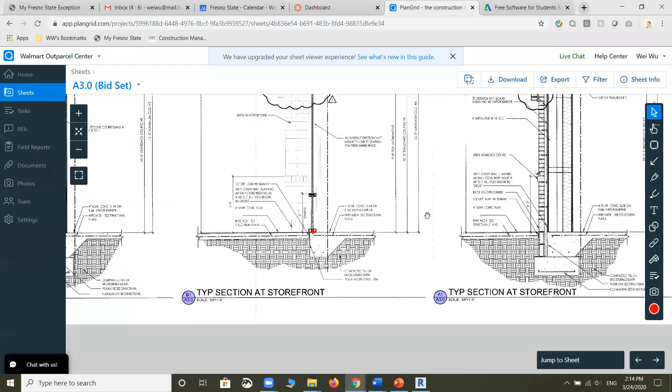So let's go to one of the section views. Section view sheets A3.0, particularly looking at B1. This is a section view for the front, the storefront. You will see the current one right there.

What we haven't actually done as part of the structural framing is one individual framing component we didn't get to last time, which is this hollow structural steel 6x6x5/16. This horizontal beam is actually a major structural component for the front facade of that storefront. So you have the curtain wall system, the storefront system at the bottom of the wall. At the top, above that curtain wall system, you have the regular EIFS system, which is a typical facade wall used in retail buildings.

Now, what we need to do is add that missing structural component to our original framing plan. The size of that steel component is HSS 6x6x5/16, which is easy, but there are more details in terms of where it's supposed to be. You're supposed to find that from the structural drawings. So we'll go to sheets S5.0.

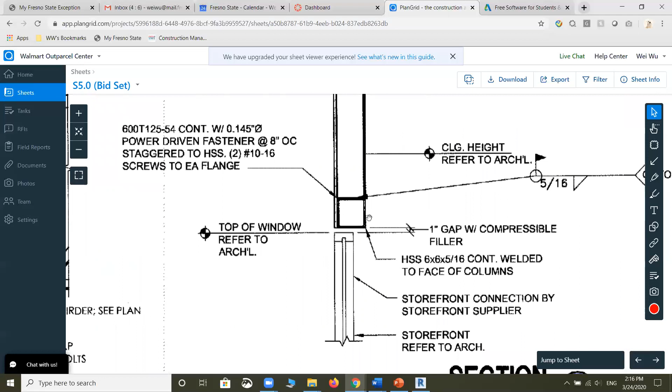Those details are for the structural framing, and you're looking at this particular detail here, right above the curtain wall system, and you see that particular hollow structural steel, which is here. In terms of its location, it's a 1 inch gap with a compressible filler right above the curtain wall itself. It's a 1 inch gap there, okay?

So you know its location, you know its size, and here is a note you need to pay attention to in terms of its horizontal location. It says here, continuously welded to face of column. So you will need to weld this hollow structural steel to the face of the columns at the front, on grid line 8. That's the location of that structural beam right there.

Now, its height, because this is 1 inch above the curtain wall system, it will be useful for us to actually find out the height of the curtain wall. Then we can calculate at what elevation exactly this HSS structure is located. So we'll go back to A3.0 and look at this particular detail here in the middle, B1 detail.

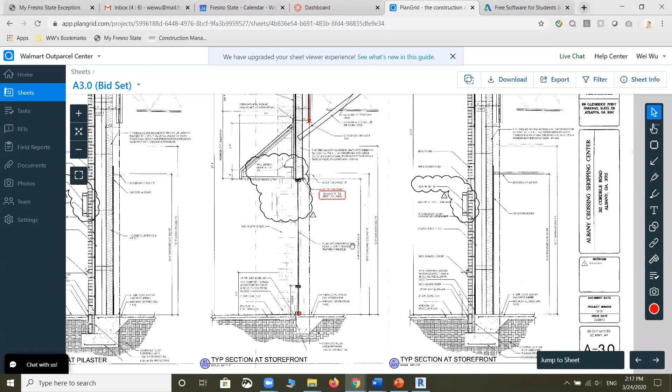All of you try to tell me, what is the height of that curtain wall system? I'm looking at this particular part here. So what is the height of the curtain wall system? If you could type your answer in the chat box, that'd be great. Let's see what the height is. Can you find it out?

Okay, well, we got the right answer already. Jerry answered 9 foot 8 inches. That's exactly right. See that? 9 feet 8 inches, top of storefront.

Okay, so let's do the math here. 9 feet 8 inches is the top of the curtain wall. Then you have a 1 inch gap there, so that's 9 foot 9 inches. Then remember that when we try to place a structural component, it's always starting at its top level. So in this case, the HSS structural beam we're going to place is actually 6 inches tall, thickness wise. So add 6 inches plus 1 inch to 9 foot 8 inches. You get that the top of the structural steel here is supposed to be 10 feet 3 inches: 9 feet 8 inches plus 1 inch gap plus 6 inches of its own depth gives you 10 feet 3 inches.

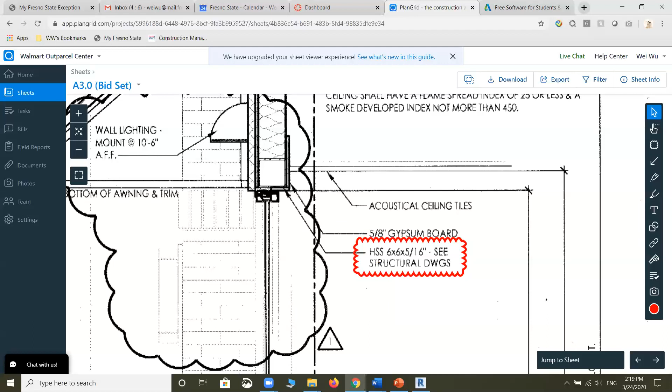So that's the height you need to place it at. However, our model does not have a 10 feet 3 inches level, obviously. So what we need to do is choose a level to place it, and we oftentimes choose the top level, a high level, when we're trying to place structural components. So what we need to do is place that at the 14 feet 8-inch joist bearing level.

Okay, open your Revit model, and let's go to our floor plan. Let's go to joist bearing, 14 feet 8 inches. Now, where is this structural steel supposed to be?

It was supposed to be by the face of the column. One thing I'd recommend in this case, we're trying to place this structural beam and we have this roof in place.

We can hide this roof so we can actually see the column location and be able to weld the structural steel to the column. So here we can hide the roof. Does anyone remember the shortcut key we use to hide something? Does anyone still remember? We showed that in class last time.

It's something called hide element, right? You can right click and say hide in view, hide element. Or there's a shortcut key combination: E stands for element and H stands for hide. So you click on that and type EH, and EH is going to hide that component.

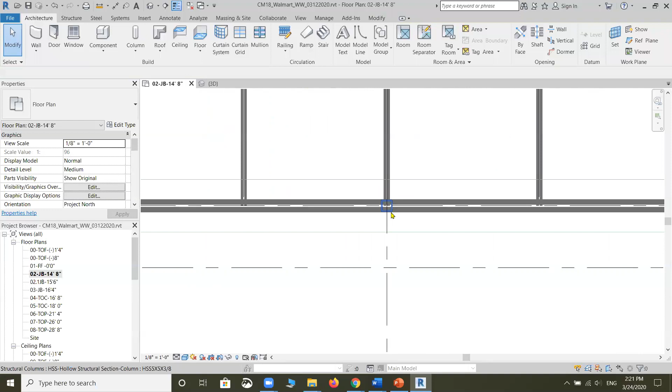Now if we go down here, what we're trying to look for is the columns. The column is actually right here, do you see it? Sometimes the color is actually distracting. I find the colors of the texture really distracting.

In that case, what I'm trying to do is hide the color. So I'll change my visual style at the bottom of the screen to hidden line. The hidden line is going to cancel the color of that component.

Now the horizontal structural steel that we are currently missing is going to go everywhere that gutter goes. So we're going to start right against that wall here, all the way across the whole building, and weld to the face of the columns all the way to the other side.

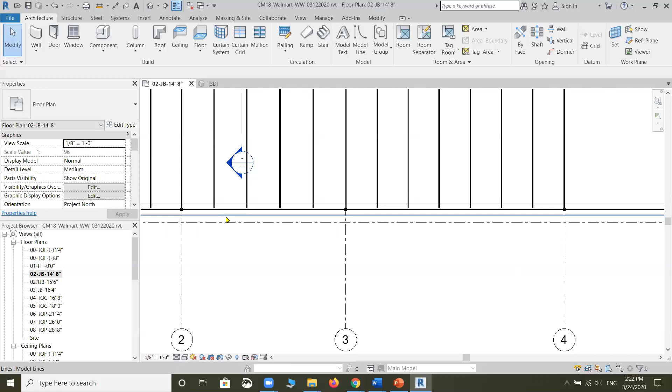Well, obviously, in reality nobody's going to manufacture such a long hollow structural steel. You will actually produce standardized sizes, such as maybe 20 feet or 40 feet, and then splice them at the spot of installation. But for the sake of saving our time, we're going to just draw this thing at one time.

So what we're going to do is make sure that you are on Level 2 Joist Bearing 14.8. Then we're going to go to our structural component and try to place a beam, so it's going to be a structural beam. Now at this moment, we don't really have that structural beam loaded.

We need a hollow structural steel. You probably remember we had columns that is HSS, but the column is a vertical structural component and the beam is a horizontal structural component, so they're quite different. So what we need to do is load that component.

So if we go to load family, because when we look up we don't find that HSS 6x6x5/16 structural steel we need, we need to go to load family. When you go to load a family, you'll see something like US Imperial, that's the library folder. We need to go into structural framing, and it's a steel structural framing component. You'll see HSS, hollow structural section steel, right? We choose that one, and then you'll see the whole list of different sizes that manufacturers provide.

So the one we need is actually HSS 6x6x5/16. You're going to scroll down and find that right there, okay? HSS 6x6x5/16. Choose that, and now you will have the hollow structural steel.

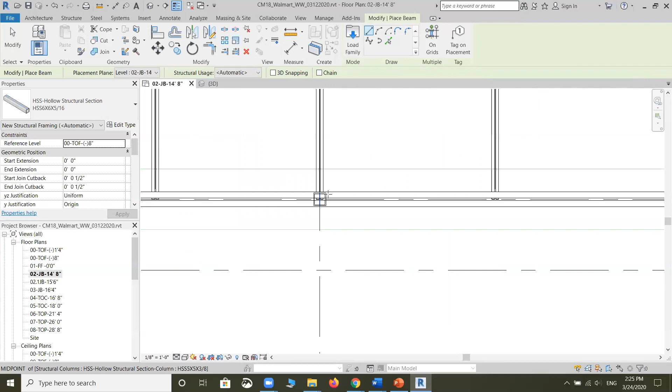We need to move that structural steel next to the column because they are welded to the column. So you'd say, why don't you start from this point here? Yes, we can, but it would not be able to snap to things, so we'd like to use the column as a reference first. We just snap to the face of the column anyway.

One thing you'll notice later is that the actual justification, which means when we're trying to place this structural steel, will follow the center line of the structural steel, which is not exactly what we want, but that's okay, we can move that a little more.

So at this point we just click on the first column, the exterior face of the column, and go all the way across the building right here, until you see the other wall. So you will stop there, at the wall.

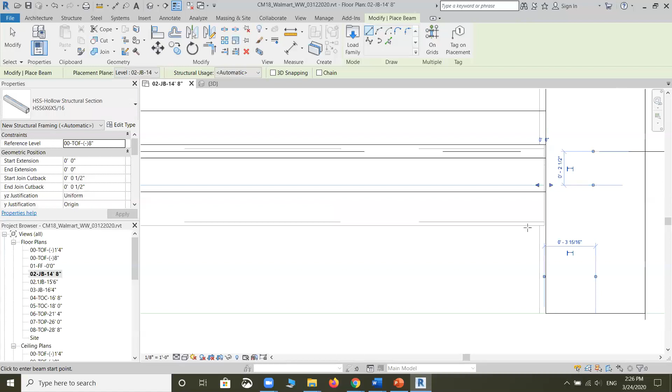After you do that, you'll see the structural steel. Make sure those arrows go to the face of that wall. So on the other side, you will extend this part.

I have a question, I can't seem to find the columns. It's not appearing on my screen. I'm on the right floor plan.

Do you see a pop-up message saying anything placed cannot be visible? No. Okay, did you place it though? The columns? Yes. No, the columns. Oh, the columns. You can't see the columns? Yeah, I can't see the columns.

Do you have your roof height hidden? Did you hide your roof? Yes. So look at grid line A2, can you see that column there? Yeah. Okay, so that's the column you're looking for.

I don't have that, I don't know why. You don't have the A2 column? No, the column doesn't even show.

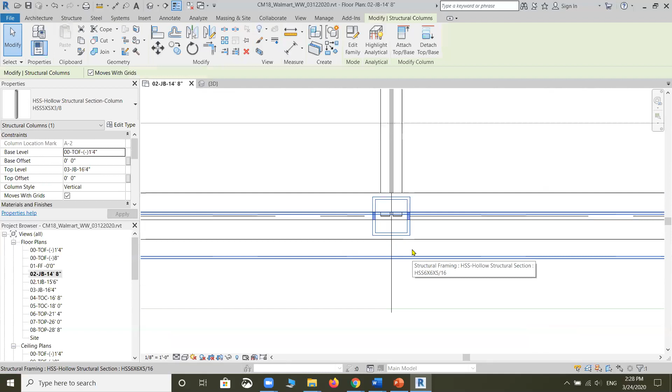In your 3D view, do you see the column there though? Let me check right now. Yeah, it's placed there, it's there, right? Yeah, and the elevation is 16.4, the topmost point.

You can use the spot elevation to check it. 64? Yeah, is it? Yeah. Okay, so let's try one more thing.

Come here, okay. What you need to do is actually check your view range. Wait, the floor plan? Yeah, go back to your floor plan. Okay, you're saying you can't see this column, right? Yeah, I can't see that.

Okay, and your roof is already hidden. Yes. Okay, so what do you see at this spot? It just shows like, I think it shows the wall, the brick. The wall? You don't have a wall here. Oh no, well it looks like there's concrete.

Right, that's the slab underneath it. Yeah, so it just shows that, but I can't see the column itself. Well, you can't see this column.

How about other columns? Let me check. No, none of the other columns are showing either.

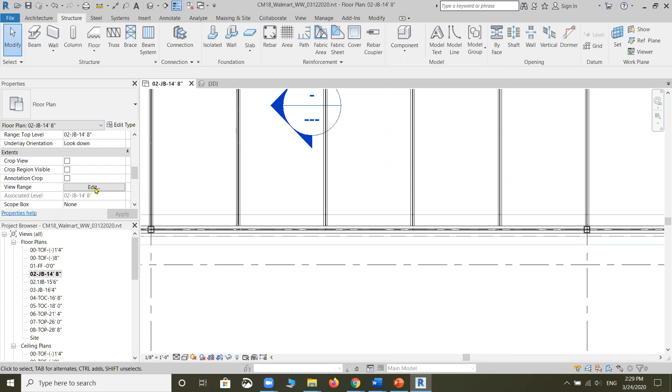Okay, do this. Don't select anything, look at your view range. Go to your project browser, rearrange, follow the palette, view range. Check, let's choose, make the bottom to be level below. Click on apply.

Does it actually help? I'm trying to find where it says view range. Right here, look at my screen first, where it says extents. Yes, click on edit. Fix your bottom view range to be the level below, and also the view depth to be level below. And click on OK.

You see that? Yeah, oh well, it's not working now. I'm not sure what's going on.

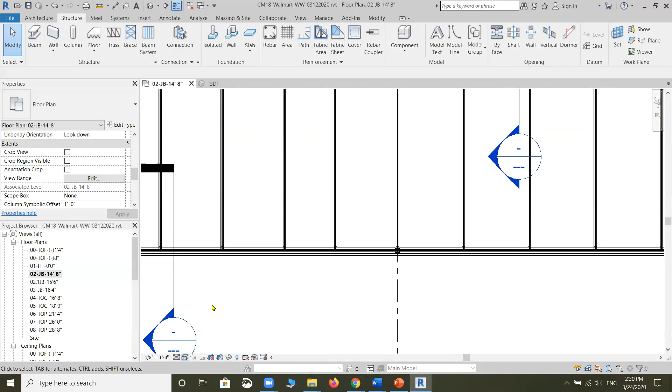Okay, how about we do this, try one more thing. Change your visual style, look at my screen. Change your visual style to wireframe. Okay, does it help? Oh, all my beams pop up.

You still don't see the column? I can see the beams now, but the columns still don't show up. Okay, one more thing - are you on the floor plan or the ceiling plan? I'm on the floor plans. You're on the floor plan. Yeah, and did you double check your spot elevation is 16.4?

Hold on, 3D - yeah, hide your roof. Check your spot elevation for me. Go to annotate, spot elevation. Okay, what's the reading? It says 16.4. Okay, and you have those gutters next to it.

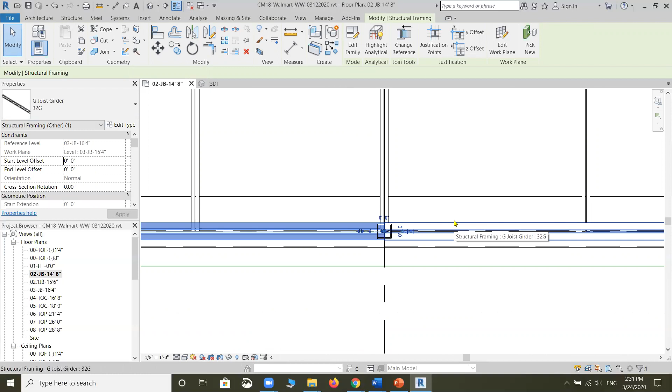Yes. So go back to your JB 14'8". Hide the gutters, choose the gutter. Do you see the gutters now? Oh, the gutter, okay, wait. The gutter - hide the two gutters.

Now can you see it? No, I don't know, I can't see it. You cannot see the column? Nope. And are you sure you're on the floor plan? Yes, I'm sure, it says floor plans and then there's ceiling plan.

Okay, let's do this - I'm gonna stop sharing my screen. You share your screen. Oh, I'm on. Okay, you share your screen with me. Hold on, let me turn on - not a video, your screen. No, at the bottom of your screen there's a 'share your screen with me', do you see that?

I'm not on my laptop. What are you on? My iPad. You're on Zoom on your iPad? Yeah, for Zoom. But I'm on my computer here. Okay. Can you see it? Well, I can barely see it, but okay, go.

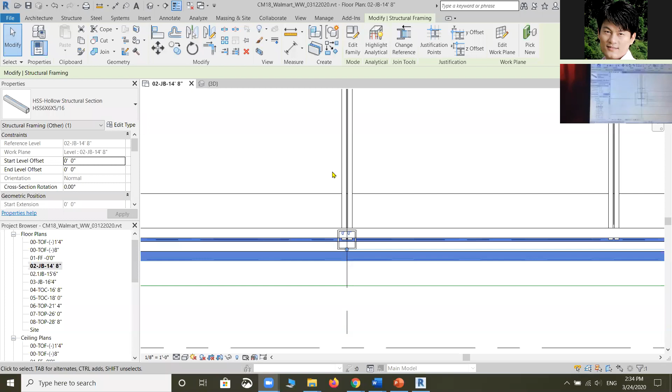All right, okay, so look at my screen now. Okay, I'm seeing what exactly you are seeing. That's the column. What I did is actually I drew the structural steel here. Okay, now let me share my screen a little quick again. The screen you're looking at - I'm looking at the column. That's the column I'm talking about. Okay, I see, I see now.

Okay, that's the column, you're looking at the wrong place. You're looking at this, not there. Yeah, you don't have a column there, you're looking at a different column. Remember that at the front we only have column A2 through A11. Yeah, okay, I remember now.

All right, so did you place this horizontal structural steel? Yeah, it's there. Okay, all you have to do now is make sure that you extend this thing towards both ends of the wall. This end is supposed to be against this wall, and the other end is supposed to be against the other side of the wall. Okay, now what do we need to do?

Go to your 3D view a little quick at this point. All right, once you see that 3D view, obviously there's a couple problems as a matter of fact. First problem: the column gets inside of the structural steel, which is not supposed to be the case, because we want to weld the structural steel - the horizontal structural steel - to the face of the column. So we need to move that forward a little bit.

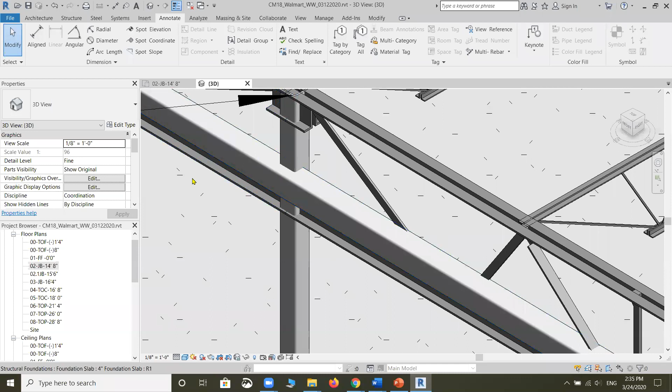Second, this is not at the right elevation, because currently that structural steel's elevation is 14/8, right? So we need to fix those two problems. So let's go back to our JB 14/8. The first thing I want you to do is this, right?

So choose one of the columns you can see here, okay? So grab that structural steel you just placed, which is the HSS 6x6x5/16, okay? Grab that. Then go to your modify structural framing tab there, and you see the modify - I want you to choose this component, this command, which is called move. Okay, see move right there? All right, click on move.

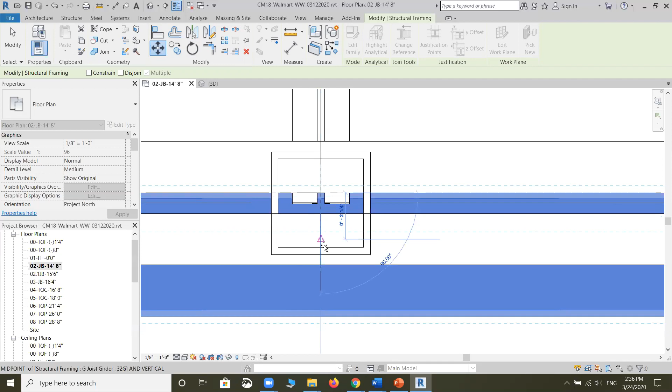Then once you click on move, first thing you're gonna select is actually the outer face, which is the exterior, the upper boundary of your structural steel. Click on that, okay, click on that. Then move it to the face of that column, okay, and just say unjoin component. That'd be fine. If that actually makes that extension fail, then you just move that, extend that again. Okay.

That's way too much. All right, let's actually drag that and extend it all the way to the wall.

Okay, that's what you need to get to. Right there. Then once we get that fixed, you can go back to your 3D view.

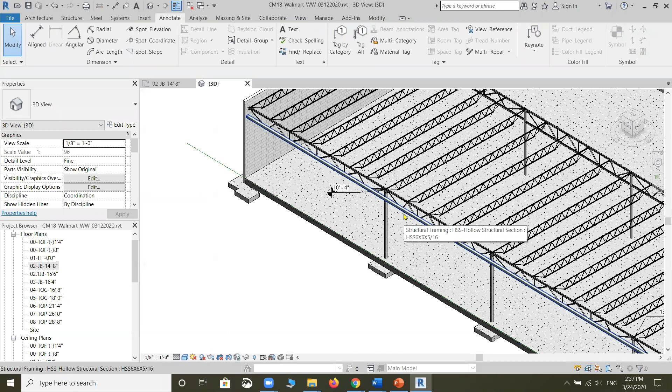You can see now it's actually on the face of the column. Now the height of this structural steel is not correct yet, so we need to go back as well.

So now, how do we actually change the elevation of a structural steel, like a structural beam in this case? Well, obviously you cannot drag that in 3D view because it's not going to be accurate, right?

So remember that what we had tried before is take advantage of these start and end level offsets, okay?

Crashed. Okay, all right, let's do that again. So what happened previously, right?

Okay, the HSS structural steel is here. It's in the center. You see the column interface actually kind of cuts through that horizontal structural steel. So what we need is to move the structural steel out a little bit to the face of the column.

So you select that structural steel first. You click on the move command, which is under Modify, Move command. Then you grab that interior side of that structural steel, and move that to the face.

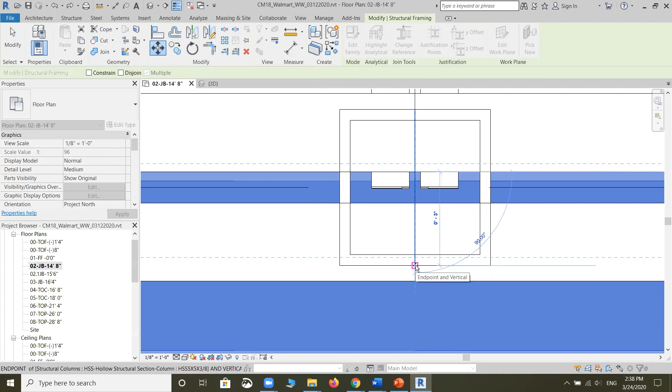Okay, do you see that face of the column? And you probably get a message saying it cannot keep elements joined. That's fine. All you have to do is just extend that thing. Okay, that's what we have done.

Move that to the face and say unjoin elements. So this is going to be short again. All you have to do now is just extend it. Again, after you move it to its right location, you extend that again.

Until you hit that edge of that wall, that'd be good enough. So you see now the structural steel is actually on the face of it.

If your beam is locked and won't allow you to move it, I'm not sure if I understand that correctly. So your beam is locked, is actually physically locked, it has a lock sign on it, or you just see that if you move that, it's going to be unjoined.

If it says unjoined, then that's fine, Patrick. So you just unjoin it, just like I did. Try that.

Did that work? Patrick, did that work?

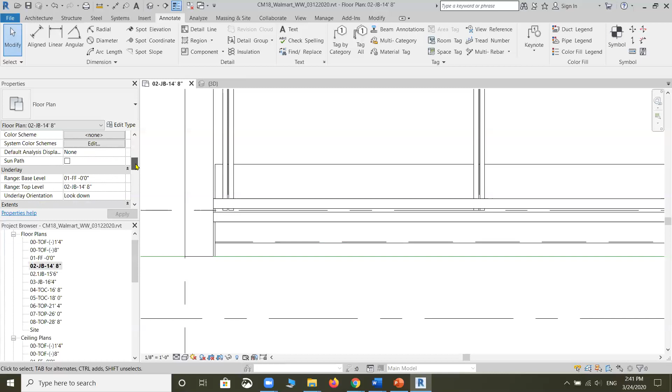Change your view range. You first scroll down, change your view range. Do you have a view range like what I set up here? Do you have a level below at finished floor 0, 0? Let's see.

No, I don't. Okay, so change that to level below, and also the view depth to be level below. Then click on OK. Okay, there it is. Now try that again.

Can you select that now? Yeah. Okay, so but you know how to move it this time, right? Yeah. Okay, so once we get that, now the next question becomes, well, even though this thing now is actually in the right place, it's not at the right height.

Our current height is at 14 feet 8 inches. We want this thing to be at 10 feet 3 inches, right? Remember that it's 1 inch above 9 feet 8 inches, which gives you 9 feet 9 inches.

But you have to take into account its own thickness, which is 6 inches. So you're adding 6 inches on top of 9 feet 9 inches. That's actually 9 feet 15 inches, which is 10 feet 3 inches. So your current height elevation is 14.8.

You want to move that down to 10 feet 3 inches. The difference is 4 feet 5 inches. So what you need to do at this point is actually use that calculation. So it's minus, okay, minus 4 feet 5 inches. That will give you 10 feet 3 inches, okay?

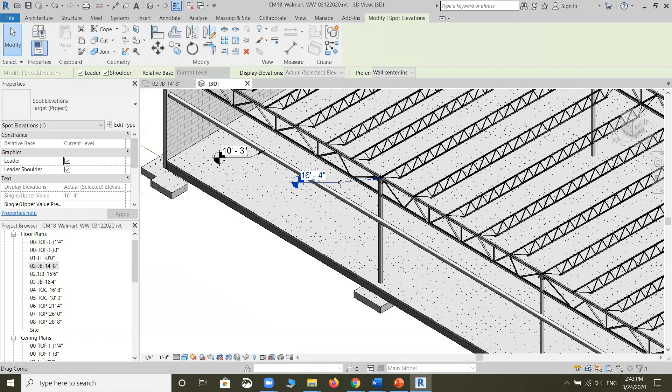Any question on moving this structural steel to 10 feet 3 inches? If not, we're going to move on.

Samuel, you have your hand up. Do you have a question or did you already get your question answered? Oh, I already have my question answered. I meant to lower my hand. Okay, that's fine.

So in that case, we are done with the structural steel, which was missing from our previous model. Now we truthfully have a complete structural framing, okay? Now let's move on to our curtain wall systems, okay?

So the curtain wall system isn't really that big a deal, but it does get some tricky parts when we're trying to model the actual curtain wall itself, okay? A couple questions there. First thing we already know is the height of the curtain wall is actually 9 feet 8 inches, right? That's the height.

Now, in terms of its location, the curtain wall system sits right by the edge of the slab, right? Right by the edge of slab. So when you look at your model, what you have is basically the slab edge, which is this green line there. Remember that? The green line is where the slab edge is. So that's where the slab edge is. Now, the slab edge is here, okay?

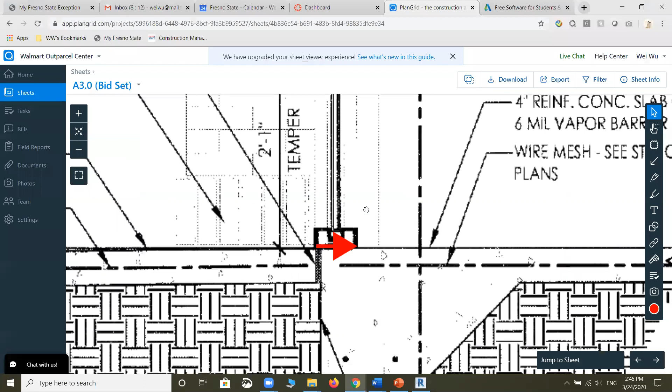And the curtain wall sits right by the slab edge, which is perfect because we already have a model line as a reference line in place. However, one thing I want to remind you is when we place a curtain wall system in Revit, it really only places the piece of glass first. Then you're supposed to place the rest of those mullions. I call it mullions because that's the name of the component.

But if you want to look at what I mean by that, you can search for, say, curtain wall storefront, and look at that image there. You see those aluminum pieces there, for instance, okay? Those aluminum pieces there at the bottom. So those are the mullions. The mullions have a thickness.

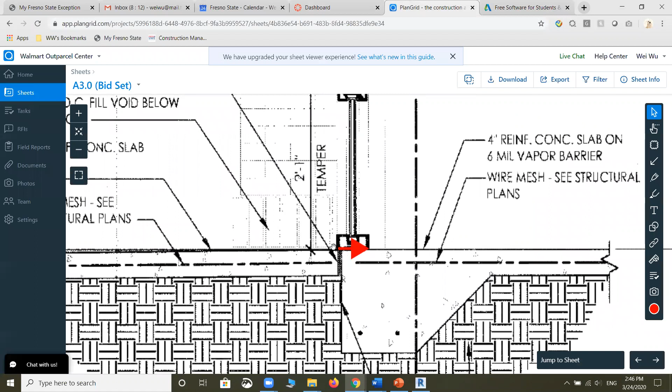The thickness of the mullions typically is 5 inches, which means if you look at your Revit joints here, this width is 5 inches. So the curtain wall glass is sitting in the middle. That glass is actually 2.5 inches away from the edge, because this is 5 inches total, and this one sits in the middle. So that's 2.5 inches away from the edge of the slab.

So that's the location we are going to place our curtain wall. Okay, so that's just one thing. Another thing is, in terms of the actual pieces of curtain wall system we have in the project, we need to come to your page or sheet A2.0. We'll look at the front elevation view. As you see here, okay, all those areas where you see those pieces of glass, all those are our storefront curtain wall systems. Together you have section 1, 2, 3, 4, 5, 6 different sections, right?

And unfortunately, because of the columns here that actually separate those sections of curtain wall, you cannot draw the curtain wall system continuously from this end all the way to this end. You have to draw those pieces individually, one piece at a time, right?

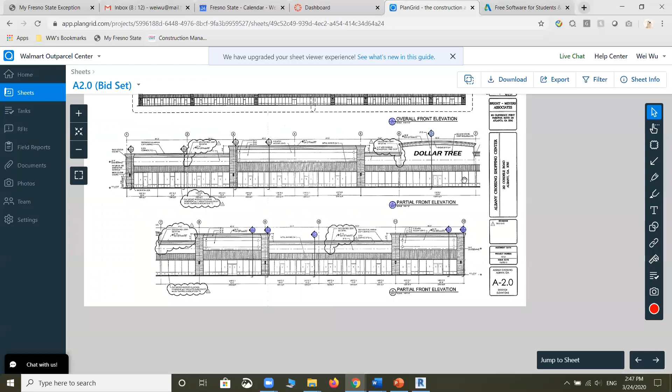So now the next question becomes, how do I determine where this section of curtain wall starts and where it ends, right? You have seen some dimensions here, but it will be easier for you to see the dimension at a different view, which is our floor plan, etc.

So this is your first section of curtain wall. Then it stops right here because you have a column. Then you move to the next one from 3 to 5, another curtain wall. Then from 5 to 8, another curtain wall system. From 8 to 9, another one. Then 9 to 11, another one. The last one is 11 to 12. So you have a total of 6 different curtain wall systems.

Now what we need to determine is, for this first curtain wall system, where does it start and where does it end? You approximately know this curtain wall system is between grid line 1 and 3. However, you need to know precisely how far away from grid line 1 and how far away before grid line 3. That's what we need to find out.

So if I show you this, you see that's the starting point, which literally is this side of the reference line for this dimension, starting right there. That's the intersection of the green line with this reference line, the dimension line here. So look at this drawing.

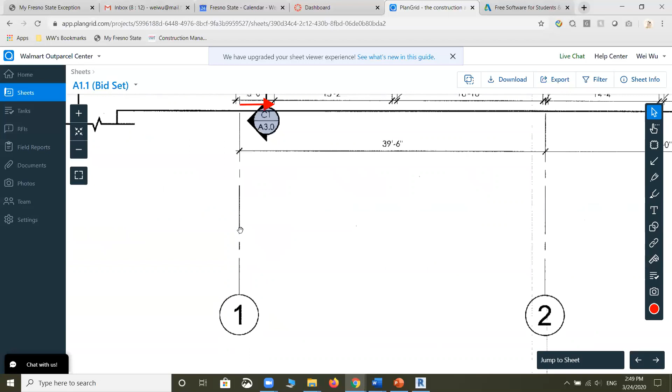Could you type that answer in your box? Try to at least try. Tell me. Okay, we have 5 feet, 5 feet, not sure. Any other answers? Okay, Ruben says 5 feet 6 inches. Anyone else? Okay, 5, 6. Any different idea?

Okay, so Josh, how did you get 5 feet 7 inches? I don't know that part. Okay, is it a typo? All right, 5 feet 6 inches.

Okay, so what if I say it's actually 4 feet 6 inches? Why is that? We need to pay attention. So the 5 feet dimension you're looking at is measuring from the starting point of the curtain wall all the way to the face of the other side of the column. See that?

The 5 feet, you are measuring from here to here. That's 5 feet. Well, what I'm asking is the distance between this line, because that's where the grid line is, to here. So this is shorter. Do you see that 6 inch right there? So that 6 inch needs to be deducted from this 5 feet. Okay, so that's why it's supposed to be 4 feet 6 inches. Does that make sense?

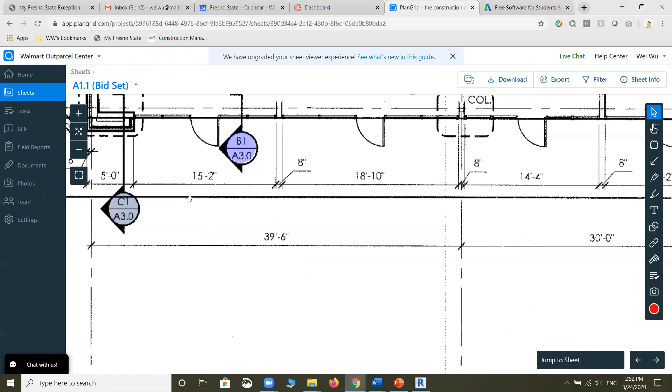Okay, so with that identified, the next question becomes the other end of the curtain wall. We know that the curtain wall stops right there by the face of the column as well. And you know the total width of this column is 5 feet. Do you see that? Now my question becomes, what is the distance between the ending point of the curtain wall and grid line number 3? What's that distance? Try to answer that question again.

Okay, well Mirage, you got that right, 2 feet 6 inches. It's right half of that, so that's right half of that. Okay, 2 feet 6 inches. Great. So now with that information, I think we're good to go place the curtain wall itself. Starting from this 4 feet 6 inches away and 2 foot 6 inches before number 3. But before we place this, why don't we try to place all those reference lines at one time? So we have this one inside here, then a second one between 3 and 5.

So the second section of curtain wall is going to start 2 foot 6 inches beyond grid line 3 and it stops 2 feet 6 inches before grid line 5. Then the next one will be starting 2 foot 6 inches beyond grid line 5 and it stops 2 foot 6 inches before grid line 8, etc. So that's what you need to understand.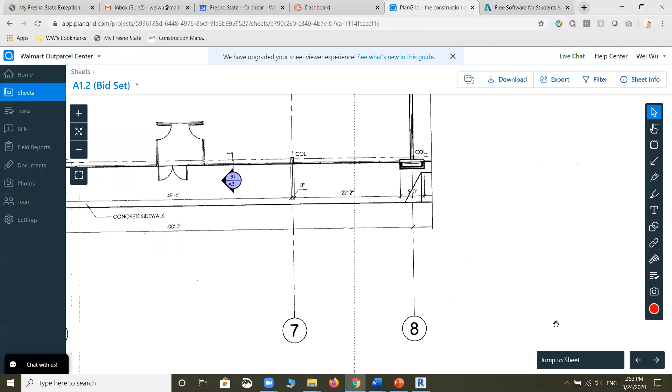So let's do this. Before we actually place the component, let's mark up those locations of the curtain wall itself first. I'll go to Revit, and if you remember, we use those green lines to mark up those curtain wall locations as reference lines.

The green lines are usually called a model line, and they are used for reference line purposes. But don't forget, you are still at the joist bearing 14' 8". Remember, we were a moment ago modeling a structural component, that's why we always go to the top of the structural component. But if you want to model a curtain wall, which is an architectural component, we're actually going to model that from the bottom of that component. So we're going to finish floor 0,0. Make sure you jump to 0,1, finish floor, 0,0.

So then a couple cosmetic things I want you guys to do: first, I don't need the color. The color is very distracting. So what I'm going to do is click on that visual style and change it to hidden line, which will cancel the color. I think it's easier to look at.

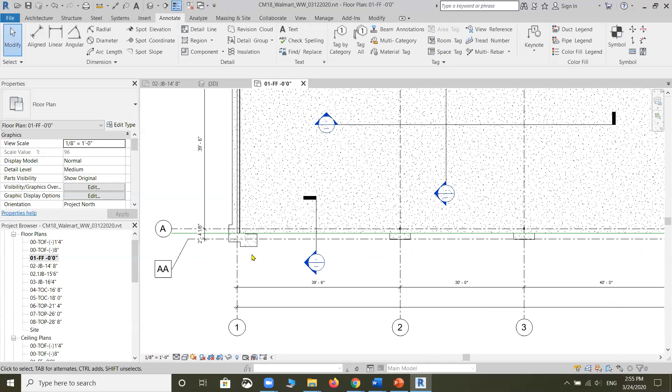So then we're going to use the model line. The model line is located under the Architecture tab, on the Model panel, where you'll see the model line command. Now I'm going to mark up the starting points and ending points for each of those curtain wall sections.

This one is supposed to be 4 foot 6 inches away from grid line 1, but when you first try to place it, it doesn't even matter. As long as you do something like this - you go to the bottom and then go up - make sure it actually intersects with the horizontal green line we originally placed, you'll be just good.

Do that one. And the distance we're going to rely on is this: click on that reference line, the model line, and you see this dimension line is not measuring exactly what I want - it's measuring the center of the wall. I want to measure from grid line 1. So this distance is supposed to be 4 feet 6 inches. On your keyboard, type 4 space 6 and hit enter, so you get 4 feet 6 inches.

So that's that location, and you probably know that this intersection is where the starting point of your curtain wall section number 1 is. Now, the ending point of the curtain wall is supposed to be where? It's supposed to be 2 foot 6 inches before grid line 3.

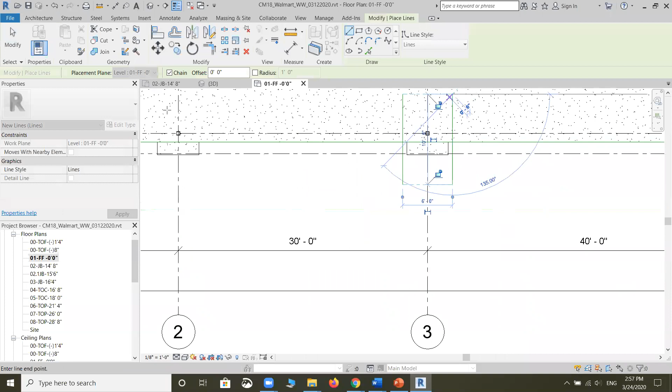So this line is supposed to be 2 feet and 6 inches away from grid line 3. This one's supposed to be the same thing - 2 feet 6 inches away from grid line 3.

So now, instead of placing those one by one across the whole project, the next one will be at grid 5, then 8, then 9, then 11. What we're going to do is copy and paste - I can just copy those double green lines and place them at grid line 5, 8, 9, and 11. That's what I'm trying to do.

Select the 2 green model lines, click on one and hold your Control key down and choose the other one, so you select both lines. What you're going to do is tell the program you want to copy those 2 lines and paste them where you need reference lines like this as well.

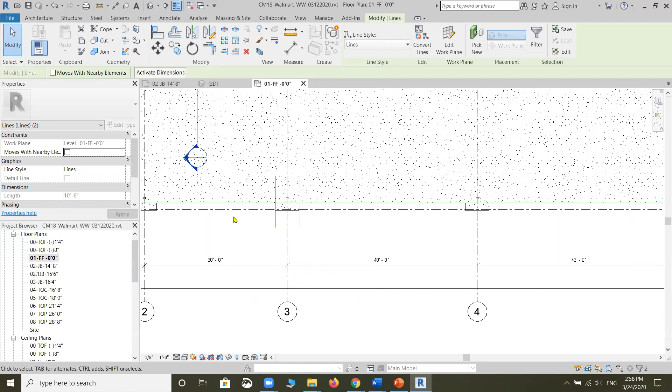So you do a copy, right here. Do you see where my mouse is clicking? Copy, okay, go ahead and click on copy. And because you are doing multiple copies, make sure your multiple copy is actually checked.

If you do not have your multiple copy checked, please do that. Check multiple. Then you need to decide how do I control that all my copy is going to be exactly on top of the grid lines, for instance 5, 8, 9, 11. That will depend on where you choose as the first reference line. So I choose grid line 3 as my first reference line. Then I can move that horizontally and click on grid line 5 one time, click on grid line 8 one time, click on grid line 9 one time, and finish by clicking on grid line 11 one time.

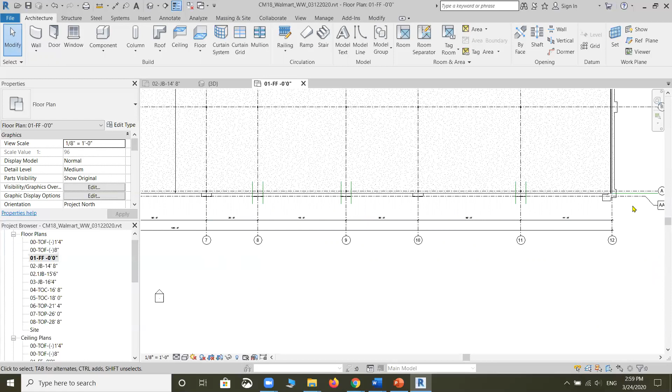So again, where do you have double grid lines as reference lines? You have 3, 5, and 8, as well as 9, as well as 11. Then the last green model line will be the one next to grid line number 12, which is supposed to be 4 feet 6 inches away or before grid line 12. So you add that one more green line right there.

Right there, and make sure that the distance is measuring, not the center of the wall. Remember it's actually measuring that grid line, supposed to be 4 feet 6 inches. So that will give all the reference lines you will need to determine the starting point and the ending point of your curtain wall systems.

Any questions on this? Any question on deploying those reference lines? If you do, raise your hand. Okay Jose, you can talk.

Yeah, how did you copy the lines again? Okay, do you want me to show you one example, or do you want to just simply ask me to redo it? Yeah, can you just redo it please? Okay. All right.

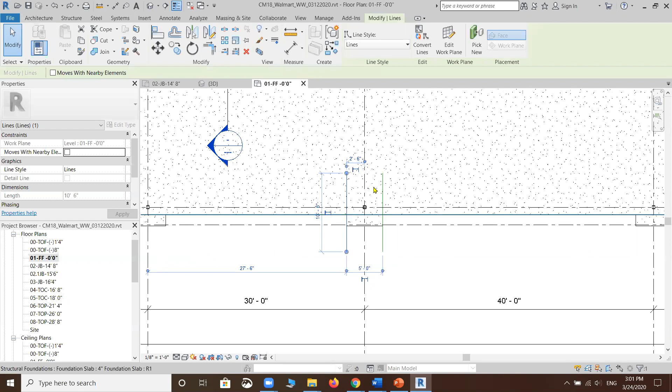All right, but you already got the two, right? Did you get the first two? You did, how far are they from the... Do you have the two around grid line 3? Yeah, I just don't know what the distance is from the middle. Well, what do you think? Look at the chat, what do you think it is? It's 2 feet 6 inches from grid line 3. Okay yeah, I have that then.

Okay, so now you choose. How do you know how to select both grid lines? Is it control? Yeah, then you select one and you use a control key. Push the control key down, choose the other line, right? So now I get 2 lines selected, right? Yep. Okay, so then you click on copy. Do you see copy right there? Look at my screen. Yep. Make sure your multiple is checked.

See that? Yep. Okay, now the next click is very important because what you want is actually to place those exactly on top of the grid line, right? So you will choose the existing grid line as the first starting reference line. Click on grid line 3, click once, okay. Then move your mouse horizontally, don't go at an angle. See that? Don't do that. Just drag that to number 5, choose number 5, click on number 5 only once, okay.

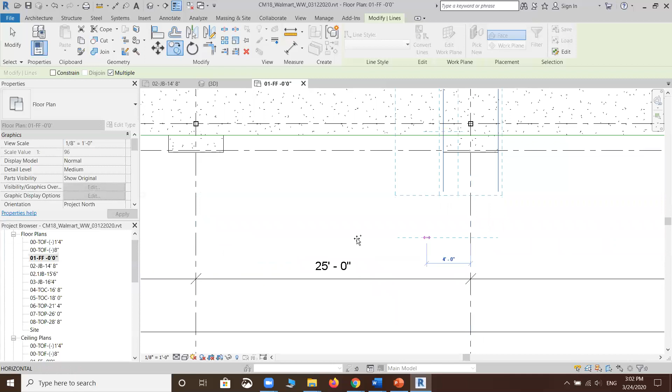Then go to your number 8 and click on that once, then go to number 9, do that again, just click on number 9, then go to number 11 and click the last time. Then you are done, click on modify. So you should have all the double grid lines being placed on grid line 5, 8, 9, 11. Do you get that? Yeah.

Okay, now the last line is another individual grid line, which is the one before grid line number 12, right? So this green model line is supposed to be placed 4 feet 6 inches away from grid line 12. So place that, you just draw that green line first, then you click on the green line itself. Make sure that you're measuring actually between this model line and grid line number 12, and change that reading of the dimension to 4 feet 6 inches and hit enter.

Get that? Is it the middle of that wall, or is it? No, you have to drag that down to grid line number 12. That's what we're trying to say.

It's measuring between the green line and the grid line number 12, not the center of the wall. You know how to drag the blue dots, right? Yeah, okay, it's just not giving me the option to put it on 12. It just keeps putting it in the middle. Well, you don't click on it, you drag it.

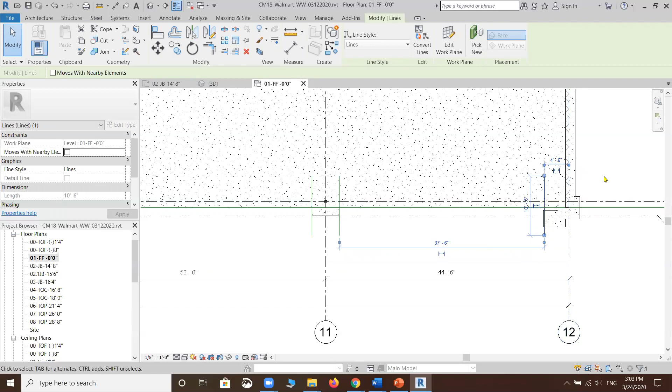If you just click on that, it's gonna switch between the side and face of the wall. But if you drag that boot out and drag it down, okay? Drag it down. See my screen? Do you get it? Yep. Make sure that's 4 feet 6 inches.

Okay, all right, do we all get that? Everyone's fine now? Okay, so if that's the case, Jose, lower your hand. Okay, good, thanks. Now we have all the reference line done.

We're good to go to place our curtain wall system. Go ahead, go to your wall command. Make sure that you are currently on the floor plan. You are on 01 finish floor 00, and go to the wall command. Click on the wall command.

What I want you to do is click on that drop down type selector, and go all the way down until you see there's 3 options under curtain wall. There's 3 different options under curtain wall. The one we are going to use is called curtain wall 1, so which is this one. This is curtain wall 1.

The reason we don't use storefront exterior glazing is it's basically a piece of glass that does not have a way for you to configure the curtain grids. The storefront will have evenly distributed mullions already placed with it. So neither one is appropriate for my particular model, so I would choose curtain wall 1 itself. Go ahead and choose curtain wall 1.

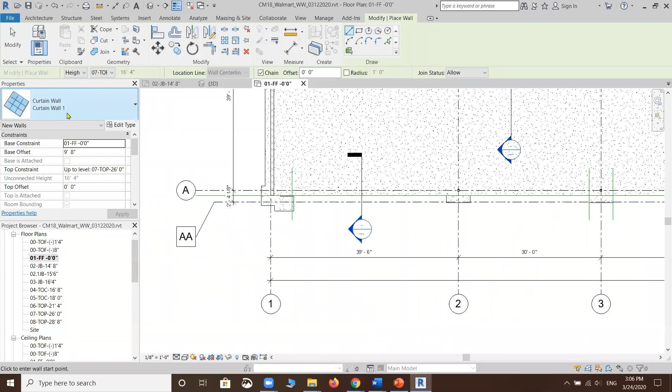But for some of the storefronts, such as some other retailing stores, they actually put the glass a little closer to the interior side, so it is possible as well. But in this case, we have it right in the middle. So by default, Revit's curtain wall will place its glass slightly offset to the inside, so then we need to fine tune it. So that's something I want to get your heads up on.

Now what we're trying to do is place a curtain wall between this intersection and this intersection. But before that, we need to actually figure out one thing, right? We know that the curtain wall is going from 0, 0 to 9 foot 8 inches.

Now, in this case, the base offset here is completely wrong, okay? Because we don't need a base offset. When you have a base offset, that tells you that's where the wall starts. No, the 9 foot 8 inches is not where the wall starts, it's where the wall ends.

So you need to change that base offset to be 0. Okay, so please do that. Go ahead and change the base offsets to be 0. Set the base constraints to be 0, 0.

Technically speaking, you can do either way. If you choose 14/8, which is higher than where your curtain wall was supposed to be, then what you need to do is provide a minus offset, a minus 5 feet offset, because you are at 14/8, you minus 5 feet, you get 9 foot 8 inches, right?

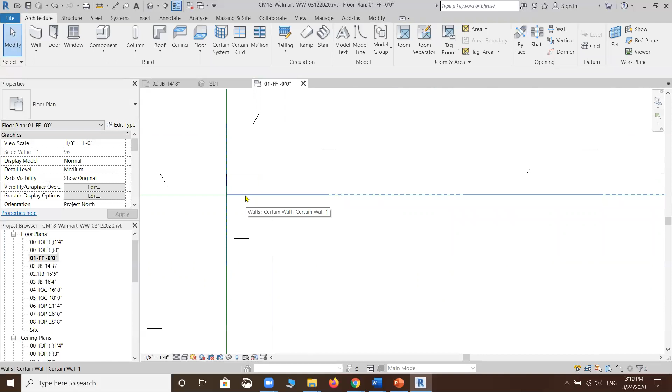But before I do that, let's go ahead and take a look at 3D again. So this is our curtain wall. Nothing fancy, just a piece of glass.

Now, to fix the problem, when you zoom in a little bit and move your mouse on top of that, do you notice that the glass is not in the middle of the reference line? So we need to fix that problem.

So what we're going to do is go back to our finish floor 0, 0. We're trying to select that piece of glass. The problem is this: when you're trying to select the wall, you always select the whole wall. You won't be able to actually choose the individual glass inside of the wall. So that's the problem.

But we do have a solution now. So what do you need to do? Instead of clicking and selecting the wall, you move your mouse on top of that wall to highlight it. Do you see my wall being highlighted? When you move your mouse there, you see the wall is being highlighted.

So then what you do is hit the tab key on your keyboard, the TAB key. Hit tab key for me, then you can grab that piece of glass right there. So tab key is the magic key. Once you get that, let me know if you have questions, or if you actually can't select that glass, let me know, because this is important.

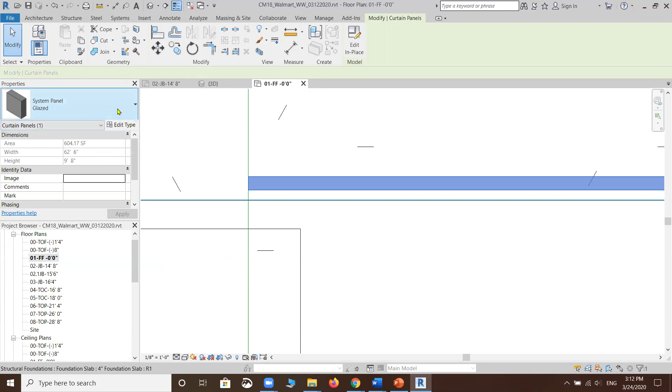Alright, looks like everyone is able to actually select that piece of glass. Once the glass has been selected, it probably is going to show up here. What I want you to change is this, right? I want you to click on edit type. Now, the problem with our offsets here is because of this offset value.

Once you click on edit type, some students probably remember that most of the time, if you want to change something or customize something, aren't you supposed to make a duplicate? Well, yes or no. In this case, we're not trying to create a new family, we're trying to modify a feature of an existing family. So in this case, you can actually just change that at this point. Don't worry about duplicating, we're not trying to create a new curtain wall system, we're merely trying to modify its original property.

So in this case, what I want you to do is change the offset to be 0. Change the offset to be 0, click on apply, and then click on OK. Now you see what happened here: your piece of glass is now moved to the center of your wall. Did everyone get this? Are we all clear on this one? Again, ask a question if you do not get it.

Okay, looks like everyone gets it. Perfect, that's great. Now, once that's done, well, it's still just a piece of glass, right? Compared with what we see from our model, from our drawings, it's quite different.

So if you look at your drawings, let's go to sheet A2.0. You'll probably ask next, well, in this case, for this first section, doesn't mean we are done. Well, no, not really, we're not done at all. We're barely getting started. What we have done so far is just providing this glass here, that's it. But notice, even just for the first section of the curtain wall, you still have those separate panels one by one.

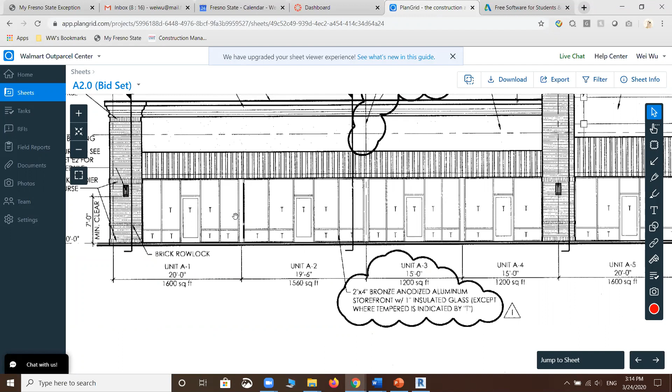So it's quite obvious. We have one area here, another area here, another area here, and another area here. So it's roughly decided by the door. This is actually a door, okay? It is a curtain wall, but you also have a curtain door, right? It's a glass door. So wherever you have a door, you'll have this little area be its own subsection. So I have one subsection, two subsection, three subsection, four subsections.

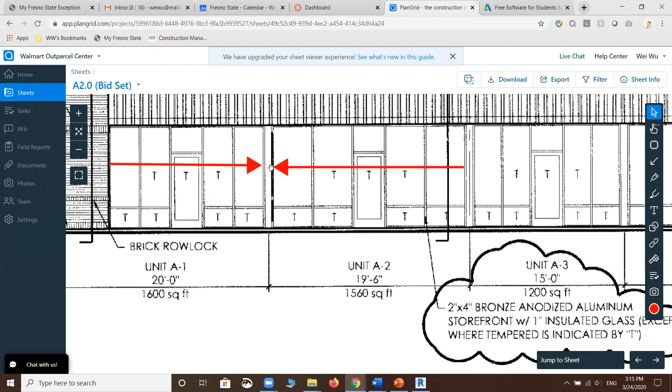And another thing that's very easy to ignore but you have to pay attention to is between this subsection, which goes from here to here, and another subsection that goes from here to here - between those two sections, you have one little narrow, extremely narrow panel here. Not only there, but also here, and here. So those subsections are divided by those narrow panels. You cannot ignore those narrow panels either, because you have to reserve space for them.

So how thick is this narrow panel? How thick is this narrow panel? If you go back to A1.1, it tells you exactly how much it is. See this subsection, the door is here, two panels on each side. Then there's a very narrow panel, which is 8 inches. Then door here, two sections on one side, two sections on one side, another very narrow panel, another door, another two subsection, and a narrow panel. And this final one only has one door and one piece of glass on each side, so slightly different for the last one. But anyway, you get the pattern there - realize those 8 inch, 8 inch, 8 inch.

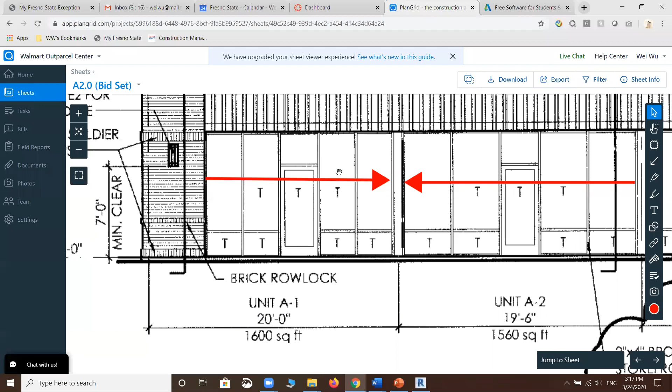So then we'll go back to A2.0. Another thing you have to tell yourself is, let's say we have this subsection defined. Now we have the door. Without even looking at anything, your immediate thought will be, this door looks to me like it's in the middle. Well, you're absolutely right, it's right in the middle. Then you'll have a further observation: the next thing I can determine is this - those two panels should have equal width as well, which means this line is right in the middle of this large panel, so they actually separate the large panel into two even sub panels. And you're absolutely right.

So what we need to do in this case is locate the door first in the middle. Then we need to look up how wide the door is. Then we create this line here. Then we use this line to further divide this subpanel into two evenly distributed panels. Same thing here, same thing here, same thing here. So first thing first, we always have to go with where the door is first. Then you separate those other panels evenly on each side to further distribute those sub panels for the subsection. So that basically is the logic of your workflow.

So let's try to work this thing out. Let's try to work this thing out. Okay, so where are we supposed to get started? Where are we supposed to get started? We have those dimensions, but the dimensions are not so useful. Like for this one, it's 20 feet measuring from this thing here. Well, grid line 1, that's fine. How about this one? Well, grid line 2, okay, that's good. There's 15 feet, there's 15 feet. So you do have some useful dimensions here.

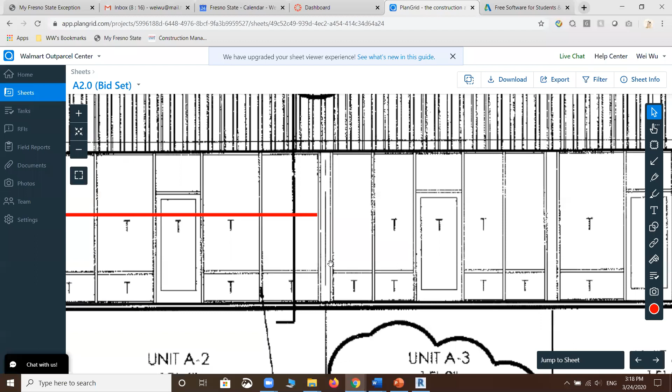So what we're trying to do here is use grid line number 2 first. Then I can determine that if I have grid line 2 here, this narrow panel will sit halfway on the left side and halfway on the other side. So if the total panel of this narrow panel is 8 inches, then the edge on this left side is going to be 4 inches beyond grid line 2. That's the kind of information I need to know. So this one is 19 feet 6 inches away from it.

That's fine, but you need to differentiate the grid line location and the actual dimension location. The dimension line here is dimensioned to the center of that narrow panel, not the edge, so it's in the middle. If you know that dimension line is here, then this one is 4 inches away from the left side, and this one is 4 inches away from the right side. So things like this are what you need to pay attention to.

So let's go ahead and go to our model. To be able to distribute those grid lines, 3D definitely is not the right place to do that cutting—it's very difficult. A floor plan doesn't allow you to do grid lines either, because you don't really have the face of the glass there. So where are we supposed to do that? We're supposed to look at the elevation view.

So let's go ahead and go to south elevation. If you could follow me, double click under elevation view, building elevation, double click on south elevation view. You will see this giant piece of bluish color glass—don't worry about that wall in the background, it's not going to do anything. That's just fine. Again, I really don't like the color, I think it's very distracting, so I will cancel the color and make that a hidden line style.

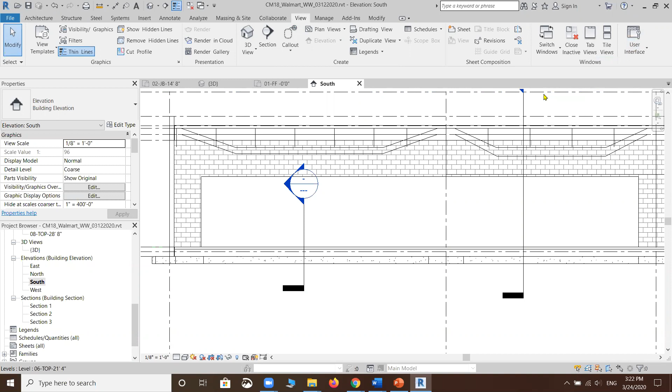Yeah, the navigation box. Okay, it's actually here under View. User interface. Let me see. User interface, all right, and the navigation bar. All right, thank you, get that? Yeah, there you go, okay. Thank you, all right, no problem. All right, so did you get that?

Okay, let's cancel the color by choosing the hidden line style. And those two section view symbols are quite annoying, I'm going to go ahead and delete them, okay? If it says your section view will be deleted, that's fine, go ahead and delete that, and delete this one as well, that's fine. We don't need that view, we can actually get those views back later on, but I just want to have a clear view of this piece of glass, and I want to see all grid lines 1, 2, 3. That's what I want, okay. All right, so starting by laying out the grid lines, okay.

So each individual panel will be defined by a type of grid we call curtain grids. It's a command on your architecture tab, next to curtain mullion and curtain system. The curtain grids help you lay out how you'd like to set up your panels.

If you move your mouse on top of curtain grid, it will show you an animation demonstrating how the grid works. If you set up your curtain grid this way, you'll be able to separate the big piece of glass into small sections. So the curtain grid is the reference line we use to determine how we'd like to separate that big piece of glass into small sections.

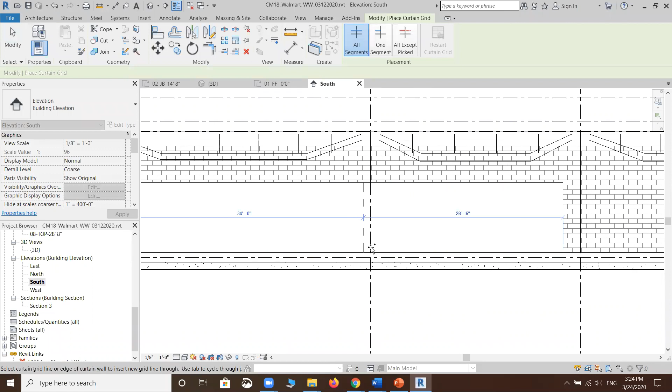When you're trying to place a vertical curtain grid, you'll move your mouse along its horizontal edge. That's how you place a vertical curtain grid. At this point, I know I need one curtain grid 4 inches on the left side of grid line 2, and another 4 inches on the right side. But it's very difficult to get exactly 4 inches at this point.

So what I recommend is just put one here and one here — it doesn't matter where they're at this moment. Once that's done, click on modify, and use the temporary dimension to make sure they're 4 inches away. Type 0 space 4, hit enter, and make sure the measurement is with the grid line, 0 4. That gives you 4 inches on this side, 4 inches on that side, altogether 8 inches.

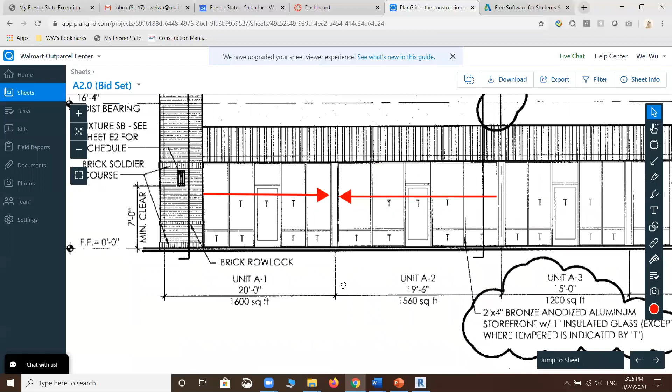So that's the first two curtain grids you'll place. Then move to this narrow panel, since it separates this section and that section — we need to determine that first. However, the only dimension we have between this panel and grid line 2 is this dimension, and it measures to the center of that panel, not the edge.

So what we need to do is first pretend we have a curtain grid in the middle of the panel, then draw a 4-inch one next to it on both sides, then delete the middle one — we just placed it as a reference. This is how it works: we'll place another curtain grid, click on curtain grid, and just drop it here, it doesn't matter exactly where.

Make sure that distance is 19 feet 6 inches. Following this 19 feet 6 inches, we can define the edge of that narrow panel because it's 4 inches on each side from the center. So you'll do another curtain grid right here, which should be 4 inches away — try your best to get exactly 4 inches.

If you can't get exactly 4 inches, just do one on one side and the other on the other side. Say here we want this to be 4 inches, and this to be 4 inches. Once that's done, the middle one you don't really need, because we don't actually have one there — we just pretended we had one so we could use it as a reference. So you can delete that one, and now you have this narrow panel done.

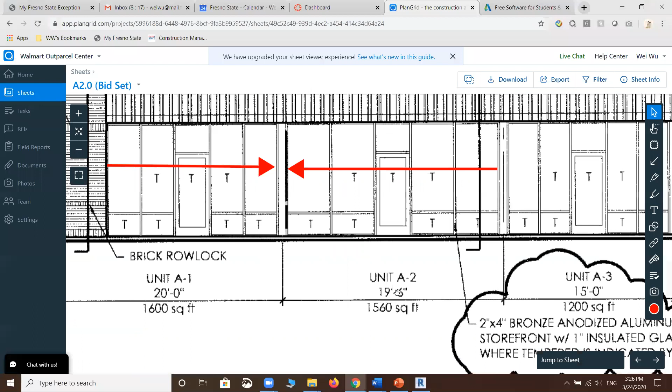How about the other side? We still have another narrow panel separating two sections here. Looking at this side, how far away is it? It's 15 feet from grid line 2, and again that 15-foot dimension goes to the middle of that narrow panel. So we'll repeat ourselves: use curtain grid and drop it, then measure from the center, from grid line number 2, and change that to 15.

Well, we don't necessarily need this grid line to exist, but we need it for the 2 grid lines next to it. So I'm going to draw a curtain grid on one side and the other side. Make sure those curtain grids are 4 inches away from that line we just drew. Once you get those 2 grid lines in place, defining the edge of that narrow panel, we get rid of that original reference grid line. We don't need it. That's how you determine the location of the final grid line there.

Okay, Patrick, question? Patrick? You had your hand up.

19.6 off the center of the grid line, correct? Not off the face of the curtain. Say it one more time. What do you mean? It's 19.6 off the grid line, correct? Correct. So 19 6 measured from the center of the panel on the grid line.

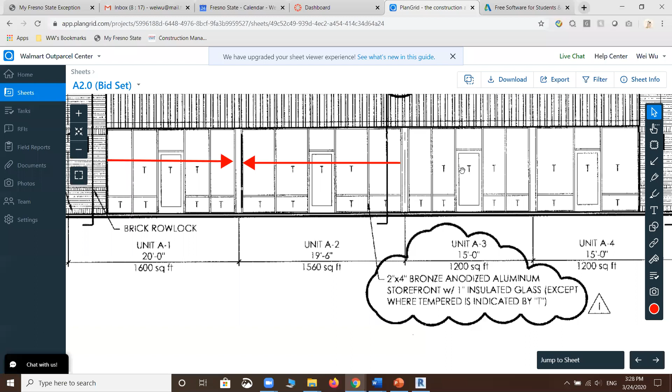Same thing here. That's why I always do the center placement first, even though you do not really have a curtain grid there, because that's the dimension you got. Then you use that one to place the 2 on each side. The total width of those 2 curtain grids is 8 inches. You could calculate it, but in this case I just say 96 to the middle, then 4 inches on one side, 4 inches on the other side. That gives the desired location of this curtain panel.

So any questions so far for those couple of curtain grids? Yeah.

What was the center of the curtain grids on the left side? It's 19.6. Look at that. Look at your join right there. See that? Yeah, 19.6 right there. Okay, I see it.

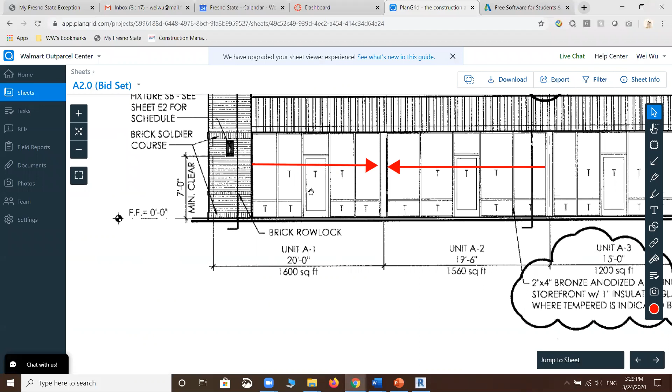Are we all good to move on? Okay, so if that's the case, for each subsection here we'll have 1, 2, 3, 4 subsections. The first thing for those subsections is we're trying to define where the door is. According to our drawing, it's pretty obvious: the door is always in the middle, middle, middle, middle. Once we locate the door in the middle, what's left on each side will be distributed evenly.

Of course you need to know the door is in the center, but how wide the door is also matters. So first thing first, this is what we're trying to do: find the center of the door, then decide what the edge of the door is going to be. To know the edge of the door, we need to know the width of the door. So could somebody help me out?

Which drawing sheet can I use to look up the width of the door? Anyone want to try? Which drawing sheets am I supposed to look at to find the width of the door? Anyone? A1? Not A1 - A1 is the floor plan, remember that? If you do not know, where would be the place to look up?

You have your cover sheet, right? So if you go to the cover sheet, you're trying to look for... first, maybe change the way we ask the question. What will typically give that? Okay, Ruben actually got that answer - it's A5.0. A5.0 is what? It's called a schedule, right? A door and window schedule. So A5.0, look at the schedule. There it is - those schedules and details, this table right there.

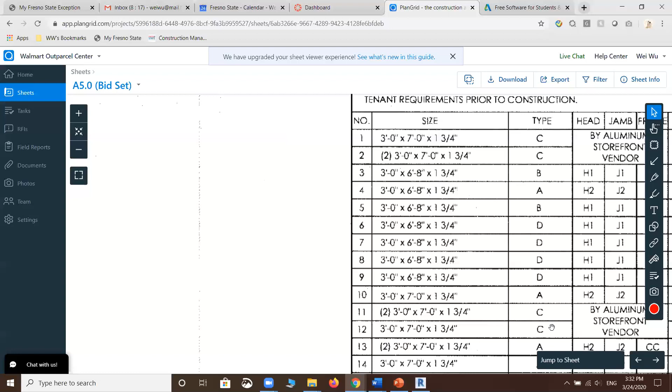So if that's 3 feet, going back to A2.0, look at that - if this door is 3 feet wide, and I decide to place the center grid line first, then on each side it's supposed to be 1 foot 6 inches away from the center. That's how you determine the door edge.

So this is what I'm going to do. I'm going to activate my curtain grid command again. First thing first, from my drawing, the door is in the middle. So you don't even have to calculate what the center is. All you have to do is move your mouse around, and all of a sudden Revit snaps to the middle point of the curtain panel. Click on that - that becomes the center of your door.

Then you need to determine the width of the door. So we'll put 1 foot 6 inches on one side and 1 foot 6 inches on the other side. That gives you the 3 foot wide door.

Then what's left is this panel needs to be evenly distributed, which means you want to snap to the center of that panel. Once you're done with that, you get rid of that middle line in the middle of the door. That gives you the door with 2 even panels on each side of the door. Does everyone get that? Any questions on this?

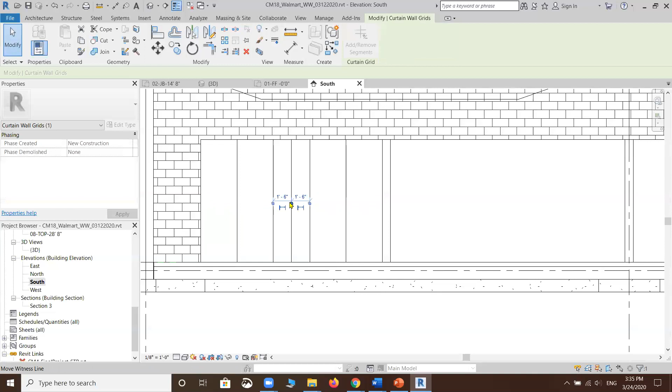Then, like I said, the center of the door curtain grid is redundant - you don't need that, so you can go ahead and delete it. But it's a great reference line for you to locate where the door is.

Everyone gets that? Okay, so you can follow the same exact methodology. Let's say I have this curtain grid right in the middle, then 1 foot 6 inches on one side, 1 foot 6 inches on the other side, then split that, and split that again. For the other one, this is the center, then 1 foot 6 inches on one side, 1 foot 6 inches on the other side, then split.

The last piece is different - if you look at the last section, you only have a door, and what's left is what's left. You don't have a split here, just one big piece of panel. So the last one is easier - all you have to do is locate its center, then 1 foot 6 inches away on each side, and what's left is the big panel.

So then you go ahead and delete all the center grid lines for your doors - you don't need that one, you don't need that one, you don't need this one either.

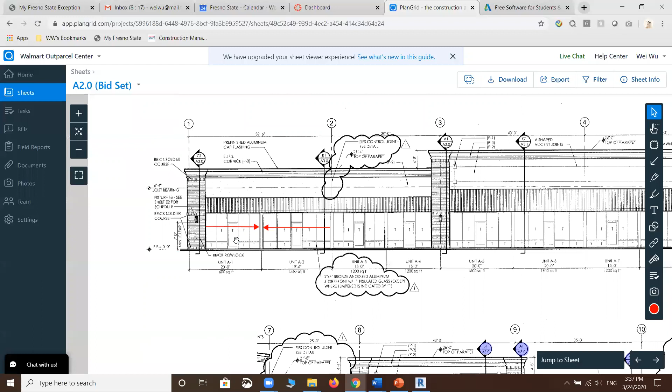Now, however, we're not done yet. Why? Well, not only do we have some vertical curtain grid lines, you also have some horizontal curtain grid lines. See that? And you still have to decide, because your door is not supposed to go from the bottom all the way up. The door stops at 7 feet tall.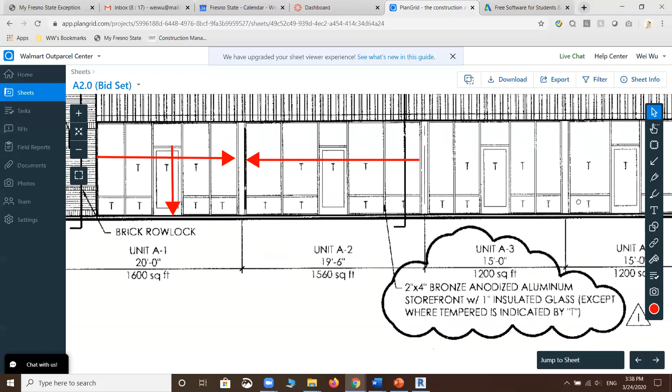So this distance here is going to be 7 feet. So you still need to actually put this grid line here, this grid line here, and this grid line here. So the difference between the horizontal grid line and the vertical grid line is that in this case, the horizontal grid lines will skip a couple of different panels. At the bottom part of the grid line, I have the grid line across the whole thing except where I have a door, except where I have a very narrow panel. So those two locations, I do not have a curtain grid. Same with this one, we don't have that horizontal curtain grid with the door, don't have it with the narrow panel, etc.

So what we're going to do with that is first we need to locate the height of this horizontal, the lower part horizontal grid line. You know that door is 7 feet tall, so that's easy. But now, what is the height for this lower part of the grid line?

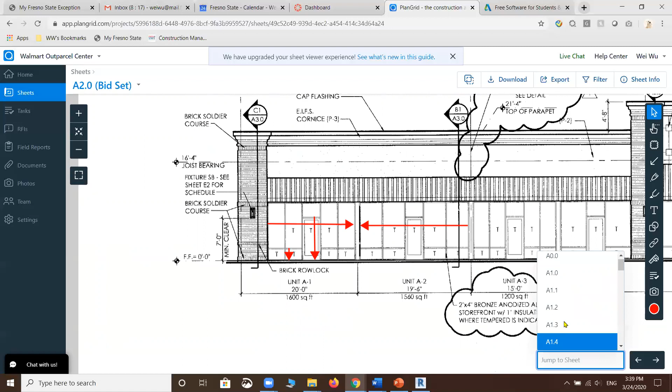Can somebody help me out? What is the reading? What's the height here? Can you find out? Where should we go to look up that dimension? Another print reading question, right? You can't get anything from here. Anyone want to try? Where should we go to? How about I come here - tell me, what is the height of that concrete? Do you see that now? No one? Zoom in. What's the height? What's the reading there?

That's right, it's 2 feet 1 inch. Okay, that's the height of your bottom concrete. So what are we going to do?

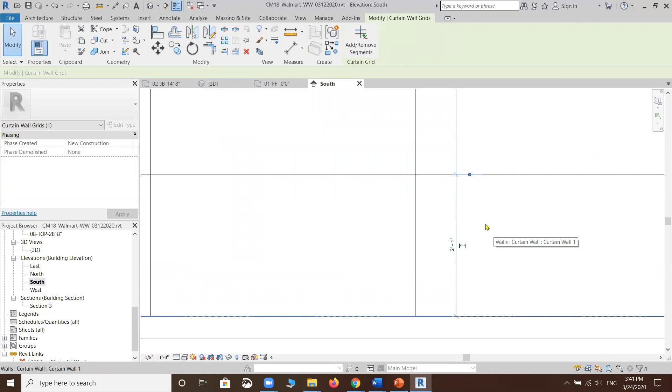You use a curtain grid again, but this time you join horizontal curtain grid. You move your mouse along the vertical side. When you first place it, it's very difficult to get 2 foot 1 inch exactly, so you just place that horizontal line anyway, do that one curtain grid anyway, then click on that curtain grid. What you need to do is actually decide this height is supposed to be 2 feet 1 inch.

Then what you need to do is subtract the places where you don't need the curtain grid. In this case, you're going to subtract this curtain grid from here, here, the door, narrow panel, door, narrow panel, door again. So curtain grid is very unique - when you actually have a curtain grid in place, not only is it aligned, but also it actually controls every single section of this curtain wall panel.

So if you want to delete this section, all you have to do is reactivate the curtain grid command itself. You choose the curtain grid itself, then go to modify, choose add or remove segments. What does this do? It basically allows you to customize where you want to keep the curtain grid, where you want to hide it, or actually remove it. In this case, we have the curtain grid all done, but we need to remove some redundant sections.

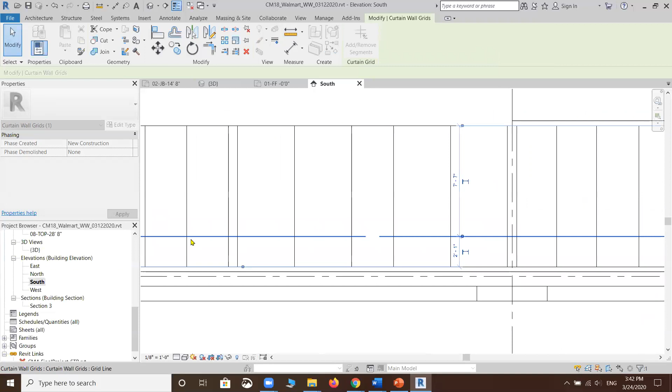So what you have to do is click on that, add or remove segments. Once you get that activated, all you have to do is click the panels where you don't want a curtain grid. So you can click on here, it's gone. And you can click on here, it's gone, but you just don't see it because it's not obvious, it's too narrow, but it's gone. The door here again, and this narrow panel as well, I click on that as well, and the narrow panel again, and then that door right there.

So then you click on modify again, you will see, right? Wherever I click on that panel, the lower curtain grid segment will be removed from the original grid line. It's gone. You can see the line is still there - it just does not have the curtain grid applied on this particular panel, which you will indicate.

So you don't need a segment on this panel, etc. Now, in order to add that curtain grid on top of the doors—you have 1 door, 2 doors, 3 doors, and 4 doors—you need to add 4 segments here, okay?

So let's go ahead and click on the curtain grid again. This time things are a little different. Previously, when we placed the bottom curtain grid, the majority of those panels needed that segment of curtain grid, so you'd place them all at one time, then remove the ones you don't want. In this case, a total of 4 segments are needed, so you're not going to try placing the curtain grid through all segments.

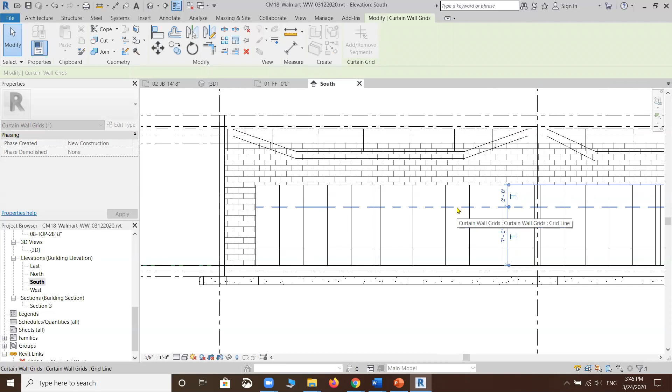So what you're going to do is choose this one segment above the door, say add a segment, so you can add one where this door is, another where this door is, and another where this door is. Then click on modify. You'll see that all the doors will have that one segment added to the existing grid line. Again, if you already have a curtain grid in place and just need that segment, you don't need a new curtain grid—you need to add that segment to the panel where you need it. It's a quite unique situation.

So, do we have any questions here in terms of layout? By now we have all the curtain grids needed placed in the right place, and we're all done. If you go to your 3D view, you have this perfectly laid out curtain grid, and the curtain wall is already in place. All you need to add now is the actual aluminum mullion to form the structure for this curtain wall—that's the last step.

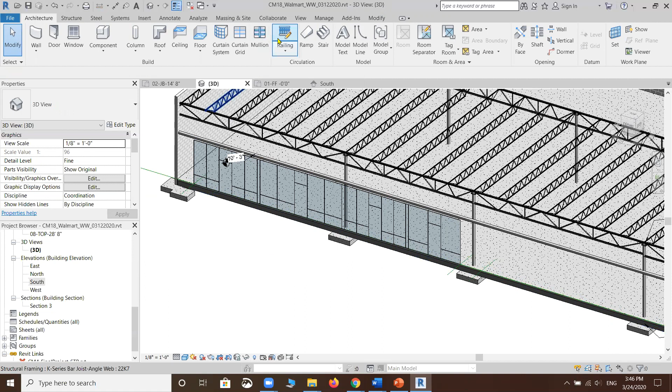So how do you actually apply the mullions? It's really, really simple. Go ahead and go to your mullion, which is next to the curtain grid, and click on that mullion command. You'll see the default mullion type is 2.5 inches thick and 5 inches wide, a rectangular mullion—that's the type we use by default.

Because we need a mullion wherever we have a curtain grid, choose the all grid lines placement option, so curtain mullions get placed everywhere you have a curtain grid. Then move your mouse on top of the curtain wall, highlight the curtain wall itself, and click only once. Then click on modify, and you'll see the curtain wall is done—everywhere you had a curtain grid, you now have a mullion, so continuously placed, it really looks like a real curtain wall.

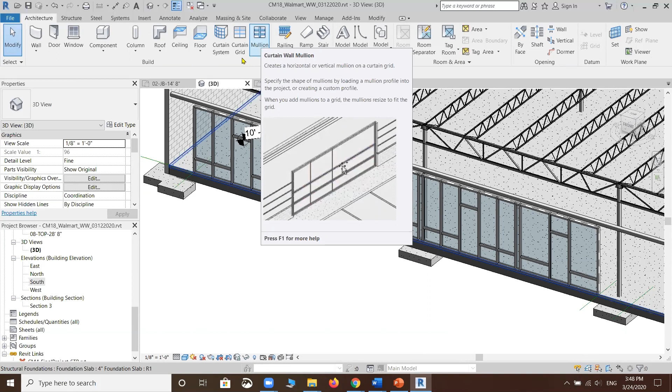So, any questions on this so far? Okay, Jose, speak out—where did you press for the mullion? Did you choose the mullion command? Look at my screen—did you select the mullion command? Okay, then you move your mouse on top of the wall and click the wall only once.

Okay, do you get it? Yeah, okay, all right. So technically speaking, we still have one little thing, one last little thing.

Did we actually mention that this place here where my mouse is, this actually is not a panel? This is supposed to be a door, right? Because if you look at a floor plan, it is indeed a door. Well, what we have here at this moment obviously is not a door, it's just a piece of glass. And you're not expecting people to go through a piece of glass, right? So you need to turn that into a door.

So to turn a curtain panel into a door is quite different from the common sense of, okay, we're gonna place a door in it. You know why? Because let's try this.

It'll be easier for us to try and see how that works. Let's go back to our finished floor 0,0 again. So you see the curtain wall right there, you have the mullions there, everything's in place, everything looks great. Okay, now let's try the door command.

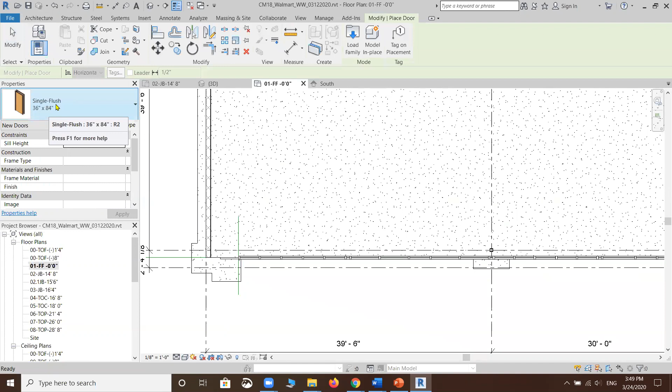You see that architecture tab, the door command. It doesn't really matter what door you are using, maybe a single flush door, whatever. You can easily place this door on our foundation wall. See that wall there? If you move your mouse on top of that wall, you can go ahead and place it. Then you have a door in place, which is really simple, right?

Now try to do the same thing to your curtain wall. Does it work? Yes? No? Probably not. You see that your cursor turns into a stop sign basically, it says you can't place a door here.

Why? Because the door you are trying to place is a common door. A common door only can be hosted by a common wall, and a curtain wall is not a common wall. It's glass. So that's why you can't put this door inside of a glass.

You will need to actually place the curtain door using a different approach. So let's go ahead and click on modify, let's delete that door in there, we don't need that door. Let's go back to our 3D view a little quick.

So for curtain walls, when you're trying to place a curtain door inside of a curtain wall, you're not really trying to place it, you're actually replacing it, which means you are going to change this panel from a pure glass into an actual door. So how to do this?

It's quite tricky. So let's move our mouse on top of that panel. Not select, look, do not click on anything, just move your mouse on top of this panel, close to maybe the bottom-ish place. Okay, then what you're gonna do, you're gonna move your mouse on top of that and make sure the wall is highlighted, and use your tab key again.

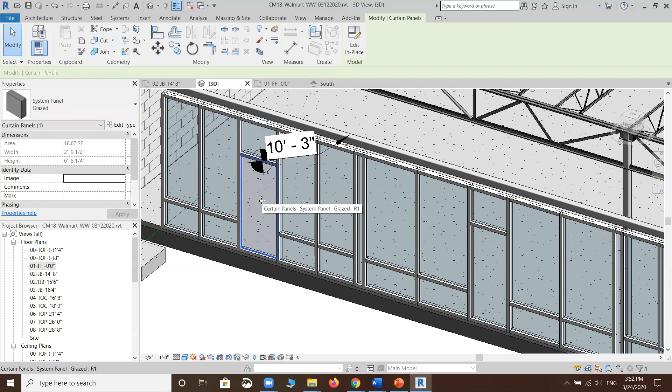So once you select the panel, the system panel glazed will show up. That tells you currently your mouse is actually selecting the panel. So then what I want you to do is this: I want you to click on edit type.

So what we want to do is we're no longer going to make this to be a panel, we want to make this to be a door. So in this case, what you're supposed to do is go ahead and go to load. Click on load, okay, then let's go up one level and one more level until we see there is a folder called doors. So we'll go up two levels until we see a folder which is called doors. Double click and open the folder doors.

And I want you to pay attention: we are only supposed to place curtain doors inside of a curtain wall. So make sure that you're only using the curtain door. So what type of curtain door do we use? Well, we already know that it's going to be a single door, so the only single door available is this one. It's called Door Curtain Wall Single Glass RFA, which is a family file.

So use that door. Okay, the size of the door - if you remember, for other doors, you probably have a size to choose from. This one does not have a size. Why? Because the size of the curtain door is solely determined by the size of the panel you're trying to select. So it doesn't make sense for the system to assign a size to this door. The size of the door will be determined by the glass you're choosing.

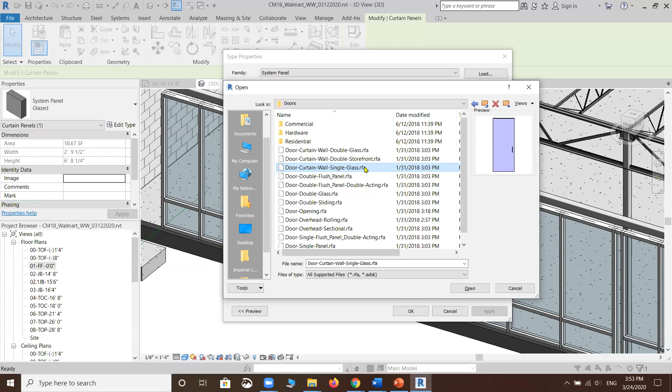So choose that single glass and open, and then the panel will be replaced by this door here. It's called door curtain wall single glass door, and click OK. So then all of a sudden it's no longer a panel - it actually becomes a door.

Okay, so that's how you actually place a door. Like I said, maybe 'place' is not the right word - it's mostly like a replace, right? You replace a panel with a door. That's how you place it. Okay, let's try it one more time, if you didn't get it.

Okay, for this door here, you want to switch or replace this panel with a door. So move your mouse on top of the wall. You see something being highlighted - that's fine, don't select anything yet. Tab key once - you actually select the curtain mullion. That's not what you want. Tab again, then the curtain panel will be highlighted. That's where you choose to select the curtain panel, then click on edit type.

This time we don't have to load anything because the glass door has already been loaded. All you have to do is choose from the family. Here, choose curtain wall single glass and click OK. Then it becomes a door.

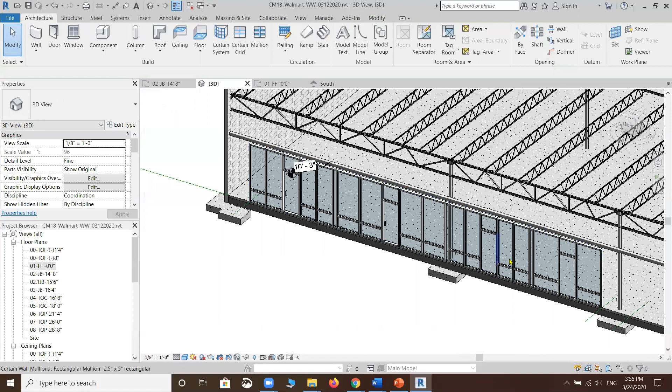So you can do the rest of them by going here, choose edit type, and single glass door. Same here - tab key, tab key, tab key. Sometimes it takes one try, sometimes two tries, sometimes three - it doesn't matter. It depends on where your mouse is, right? One time it doesn't work, it doesn't work.

Okay, move the mouse - oh, right there, okay? So it's about where your mouse is clicking. I cannot tell you whether you need three times, four times, two times, or maybe just once. It really depends on where the mouse is.

Now, anyway, when we go back to our plans again - look at sheet S1.1, we have those curtain doors. You'll notice the curtain door has a certain arrangement. The door is opening outside - it's an out swing. And then you also have a left and right difference here. How do we say a door is left swing or right swing?

It means which hand you think is easier to use to open the door and then walk into the building. For instance, will you use your left hand to open the door this way? You would not, because it would be extremely weird. You literally open the door towards the right side so you can walk through. You would not use your left hand, you'd use your right hand. So this is called a right hand out swing door. Okay, same with this one, same with this one.

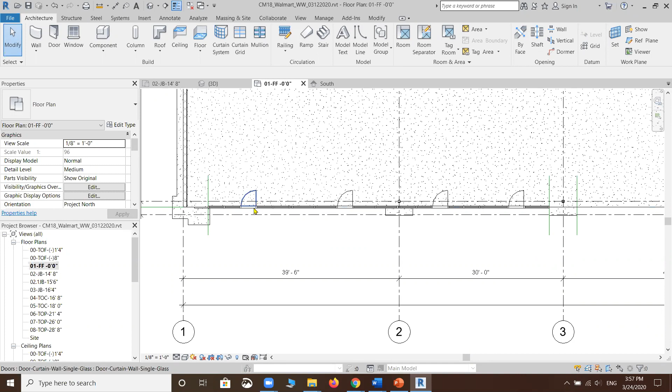You can click on the door itself, not a problem. Select the door, then you'll see two pairs of controls, right? One pair of controls determines in-swing or out-swing. The other controls left swing or right swing. So you flip that - that gives you the desired swing of your door, exactly the way it was drawn on your paper drawings. Okay, you can try that.

You can change its left and right. You can do it this way - that becomes a left swing. Okay, left hand out swing door. But this one is a right hand out swing door. Make sense?